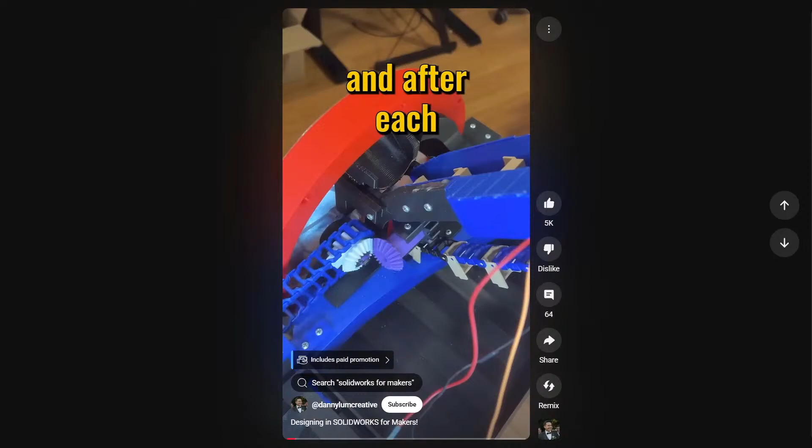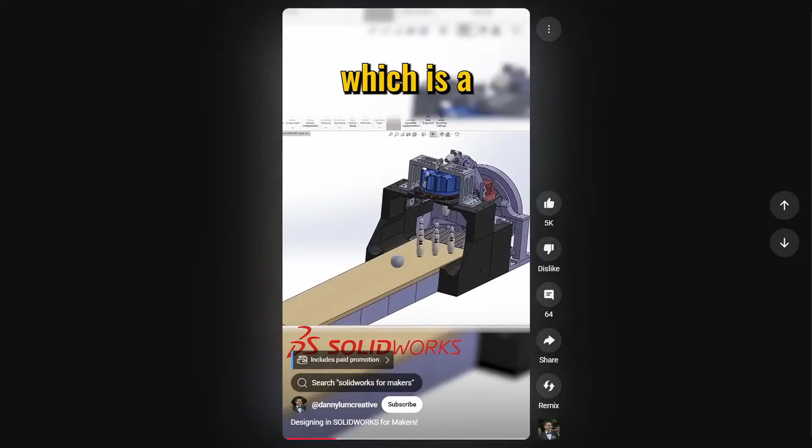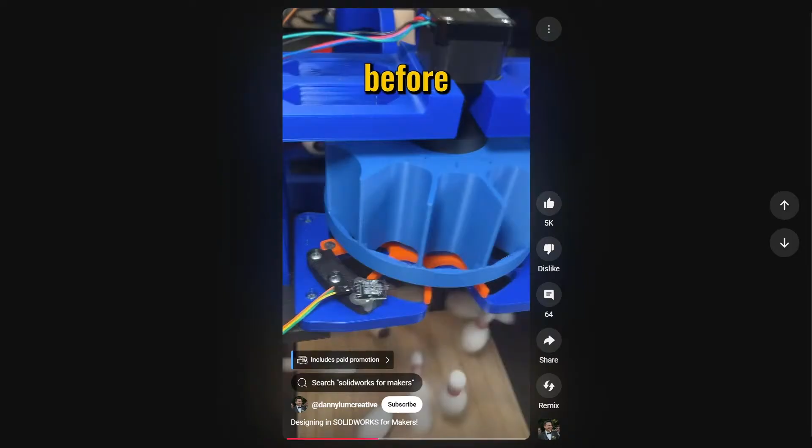And his name is Danny Lum. Danny is a SOLIDWORKS user. What you're seeing here is a project that he created. I'm not sure if you've seen this before, Jesse. I have not. So this is fully designed in SOLIDWORKS - I think every part except for the wires, every single part, gear, pin, everything was 3D printed and modeled in SOLIDWORKS.

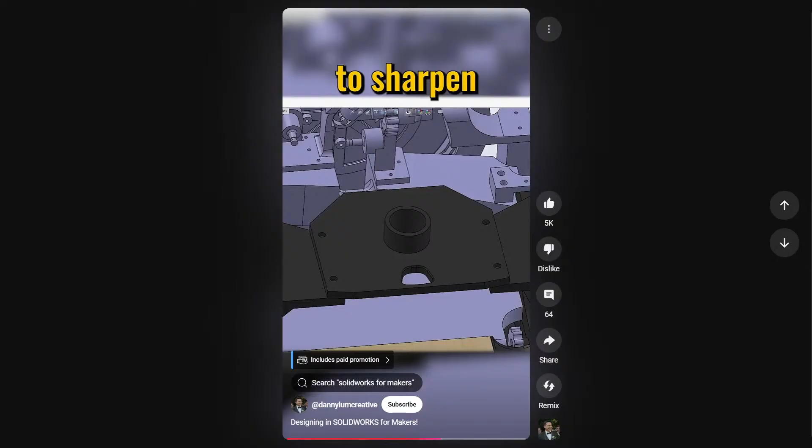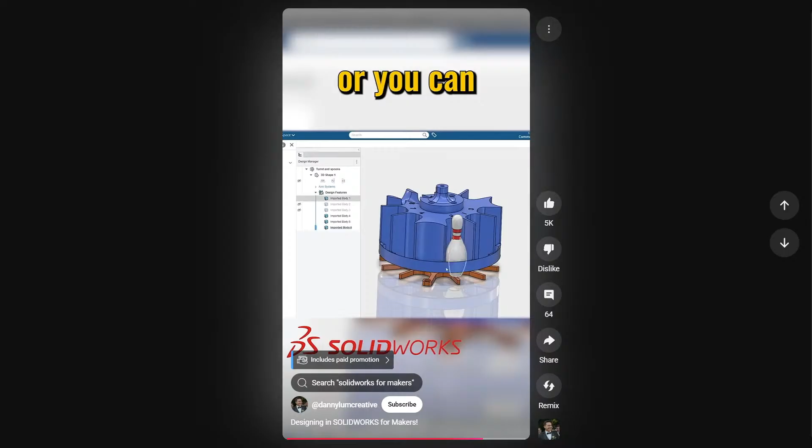He shows in the YouTube short, which is what I pulled this from, that he used a design library to pull in little gears and different components he's commonly using, and once again, 3D printing. Essentially what this assembly he's created would do is take in the pins and re-rack them - it collates all the pins, and then through a sort of conveyor system, it picks and places them back together. That's so cool.

It's very cool. I'm always impressed, if nothing else, by people who have the patience to print projects of this scale. I print something that's like a 15-hour print and I'm like, I don't have patience for this. Granted, I have a relatively old printer, so it's a little slow, but printing something of this scale, I can't even imagine having the patience for it. I want it done, and I want it done now. I'm impatient. Yeah, it's pretty intricate.

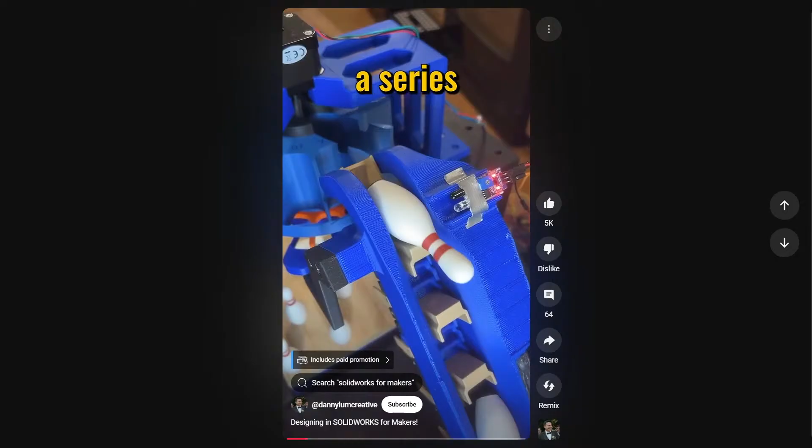So you guys see this as B-roll, but one of the reasons I selected this short, besides it having hundreds of thousands of views, is that it's pretty remarkable. That's how I became aware of it - I recently got the chance to talk to Danny, and you will too, next month on SOLIDWORKS Live Design, our other streaming series, as he'll be the featured presenter, going through different elements of mechanism design and assembly design in SOLIDWORKS. Very excited for that. Be sure to subscribe on our YouTube channel so you can stay tuned and get an alert when that episode is published and scheduled.

So very, very excited. Yeah, that's cool. I'm looking forward to that one.

Jesse, do you want to get into the enhancements? We are front loading a lot of these. I'd say we have my two personal favorites first. I agree, so let's get into it. We'll give the good stuff away first, but sure.

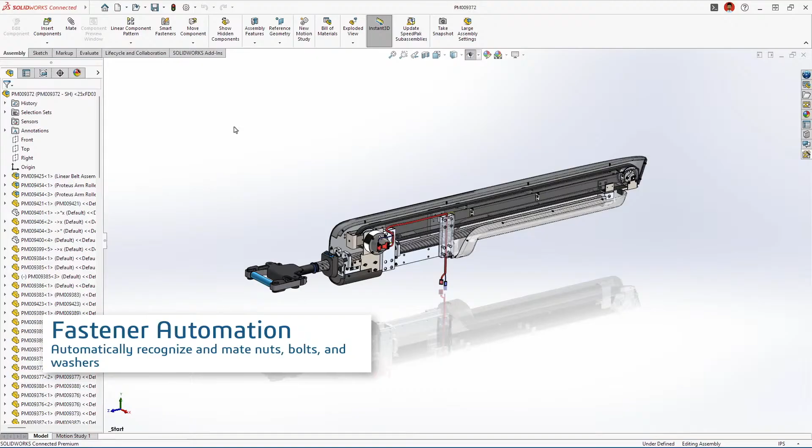SOLIDWORKS now automatically recognizes nuts, bolts, and washers based solely on their geometry. You can get a new cursor icon that confirms the fastener recognition, as well as automatic mating with a simple drag and drop. That sounds too good to be true. Boy, do I love automatic mating.

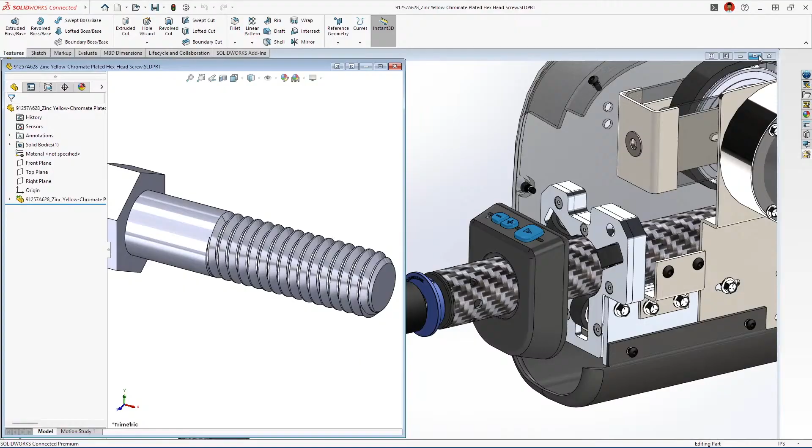So now we're not talking about toolbox. No, not necessarily. And this is an area where I said I'll shout these out - you really should watch these. This is an area where you'd see that in a demo, right? Yeah, because our colleague Mark actually shows he drags in a fastener that he's downloaded from the internet, and it's a step file. Very neat - that was one of the most impactful, and you can see he's dragging it right from Windows Explorer.

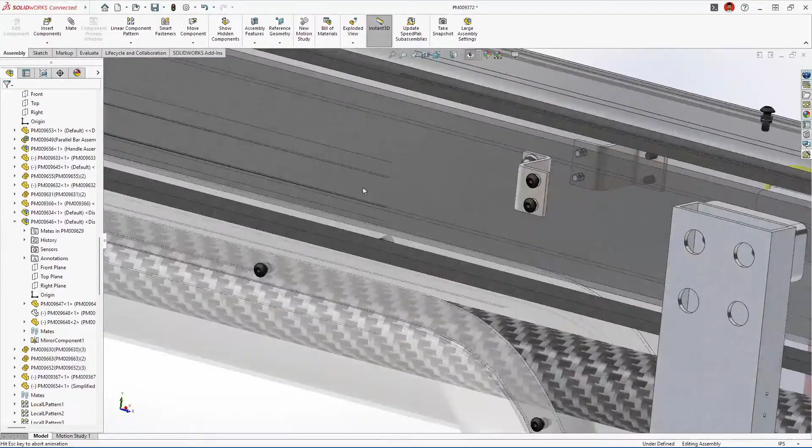I love those sorts of demos because you get tips within the tips. There's nothing special necessarily about these SOLIDWORKS files, and they aren't even necessarily SOLIDWORKS files that you're using - it could be imported files.

This is one that I would not believe if I hadn't seen and used it myself. Like, how would it? I still don't even know exactly how it does it. It's identifying that this looks like a fastener, and if it is a fastener, then I know what kind of mates to apply to it, and it will then do that for you automatically.

I find adding fasteners to be one of the most irritating parts of building an assembly, just because it's repetitive work - the same thing over and over again. Even when you're using quicker methods, like peg mates, drag and drops, control select, profile center mate, there are so many good ways to speed the process up, but it still takes forever because you've got so many of them to do. Even with the most efficient method possible, there are generally hundreds, potentially thousands of fasteners throughout an assembly depending on its size. So adding in all of those little bits is really time consuming, and anything like this where you can just drag and drop it regardless of what you're using is really cool.

You obviously work with companies online that are selling hardware, and you can usually download directly from those sites, pulling down the hardware you're using. Now, if you're using a combination of toolbox and purchased fasteners, that always gets complicated - you've got to mix and match. But it doesn't matter as much anymore because now you can make use of very quick methods of getting those in place regardless of what it is.

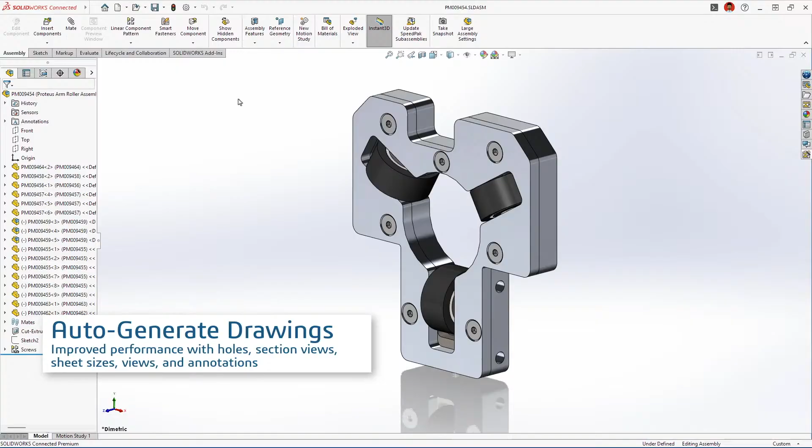So at the top here, in 2025 FD02, which came out about 7 or 8 weeks ago, we introduced automated drawing generation, and it was a great start - a great start to a mode that we have now enhanced with FD03. We've enhanced the capability with recognition of hole geometry, section views, better arrangement of views and annotations, and best fit sheet size, which is truly remarkable.

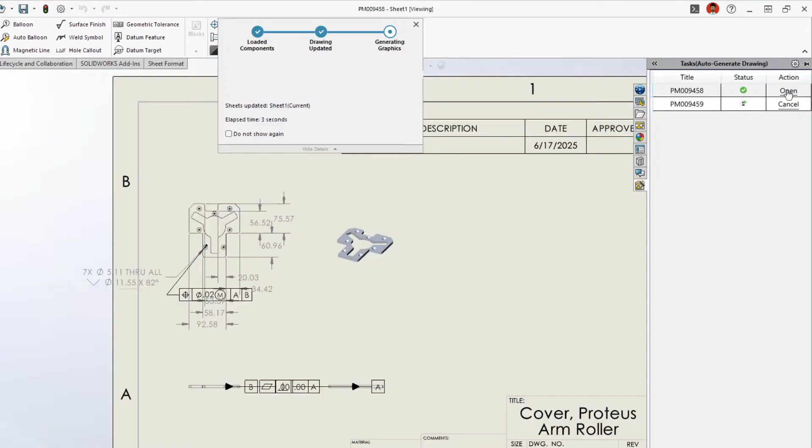I think if you look at the demo, you can see some really good examples. It gets you - and I love this - because it's a very riskless process. Click the button and it'll do something, and you might like it, you might not. Maybe it gets you 60 to 70% of the way there.

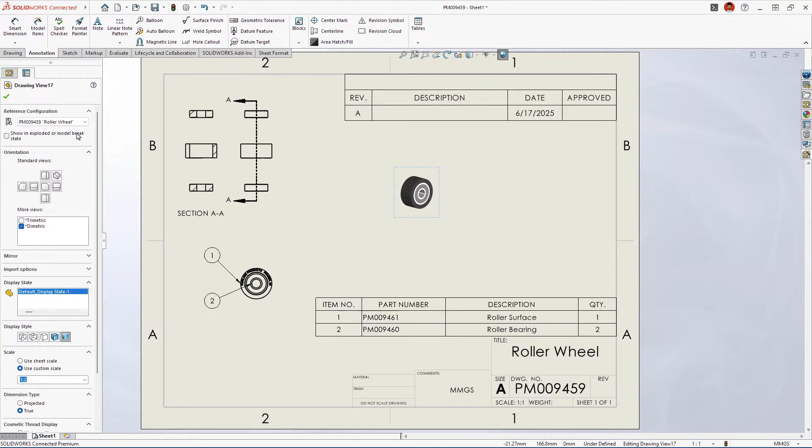And one thing I love - I think Mark made this demo as well. Mark Peterson, I think, makes a lot of great SOLIDWORKS demos just showing how it works. One thing he shows is that he does it as a batch process. He goes right into the assembly tree, selects multiple components, goes into the shortcut bar, selects auto-generate drawings, and it makes a task in the task pane whereby it's making individualized drawings for the selected components, which I think is awesome.

Yeah, that alone is cool. And then you consider, okay, once it's created those, he's going in and making adjustments as necessary. So maybe in a given view or set of views, he's changing the display state of the views. Maybe he's changing the configuration that's in use, or changing the view size. So this isn't a case where if it doesn't give you the perfect output per your preferences, you just have to scrap it and never use it again. You might have to make some edits.

I kind of almost think of it, Jesse, as having like a skilled intern or contractor who is just working for you in the background. And maybe you have to review their work, sure, and make changes and advise some things afterwards. But still, it's doing a lot of work for you, and it takes a minute. Yeah, that's a great way to put it.

I think we talked about this when the feature came out on the last show for FD02 too. But I like this - engineers, I think a lot of people take pride in their drawings, and rightly so, right? So I think sometimes people would maybe shy away from a feature like this. It's like, I like my drawings the way I like them, I like everything clean - it's the way that engineers communicate. So to take some control out of that, I could see having some resistance to it.

But in the last show, we talked about how it isn't really that. It's not going to make a finished drawing the way that you would make it or your company makes it, but it takes out all of those little repetitious steps at the beginning - just getting things on the sheet - where you're not adding any value as the engineer making that drawing. You're just picking and placing things. You take all of that out, then you can add value where you're adding value as the engineer making that drawing, to communicate the things that you want to communicate.

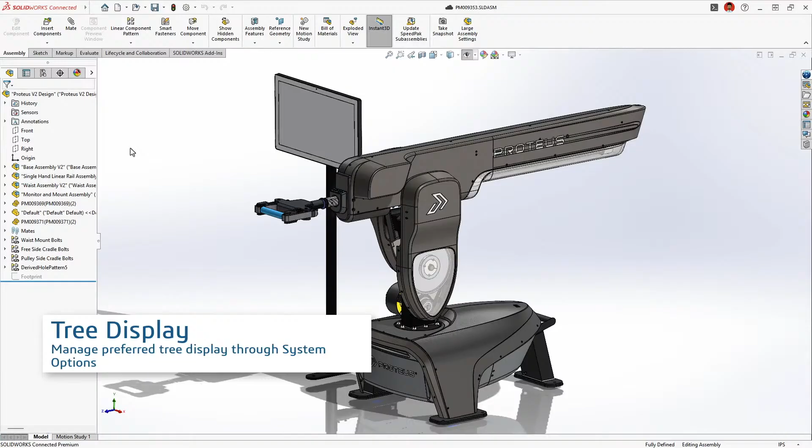Let's hear a recap of this one first, and we'll go into it. So, tree display options have been customizable for many years. However, these settings were saved into the assembly file itself. New for FD03, these options are now available as an override in system options. This puts you in control of how your trees are displayed, not at the mercy of what is saved into the file. I really like this one because I do tend to customize my tree view.

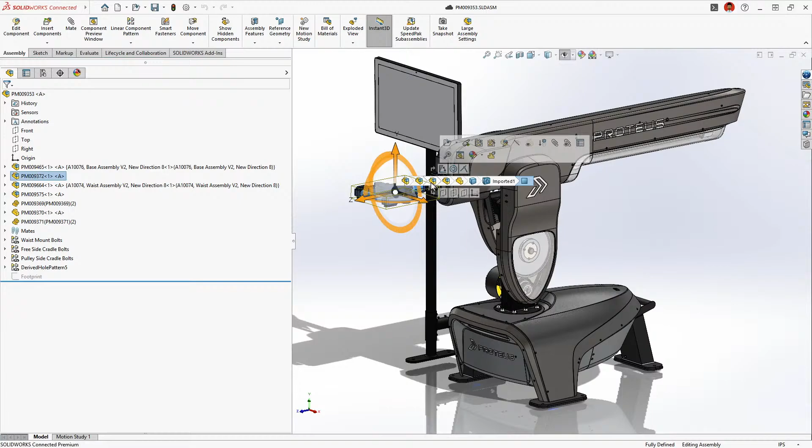Mike Sandy did this one and literally his SOLIDWORKS screen is customized to the nth degree. So Sean and I are chuckling if you're just listening along and not watching the demo. No detail spared in terms of characteristics of a component in the tree, like the description, the name. Mike, who did this demo, did a funny job of turning on everything you could turn on in the tree, just to show exaggerated how long and cluttered your tree could end up.

And that's not me. I actually go the other way. I turn off as much as I can turn off. I want it as clean as possible. And a lot of people don't realize that you can actually control that, right? You're not stuck with the defaults of what gets shown in your tree. For a very long time I didn't know that.

Yeah, and even if you're using just simple controls in the settings, like the one we added a long time ago to turn off names that are not customized or added, right? So if you can turn off names for the default, the common default you see in there, you've got default config, default display states, everything's default. That doesn't add any value, right? So there's a checkbox and you can turn those off. That's not part of these settings.

Sure, but just in terms of customizing your tree, even if you just do simple things like that, or turning on the comment indicator - we were talking about comments for a couple of our previous shows - just being able to tune that information to what it is you want to see is part of the benefit of being able to control that.

But it always got saved into the assembly. So whoever is saving the assembly, you're either fighting each other or dealing with whoever saved the file with that information or that view, essentially. Now you can set it as your system settings, so you can say, this is how I always like to see my tree - just override whatever was there with the information I want to see. And then you'll always get the view that you want.

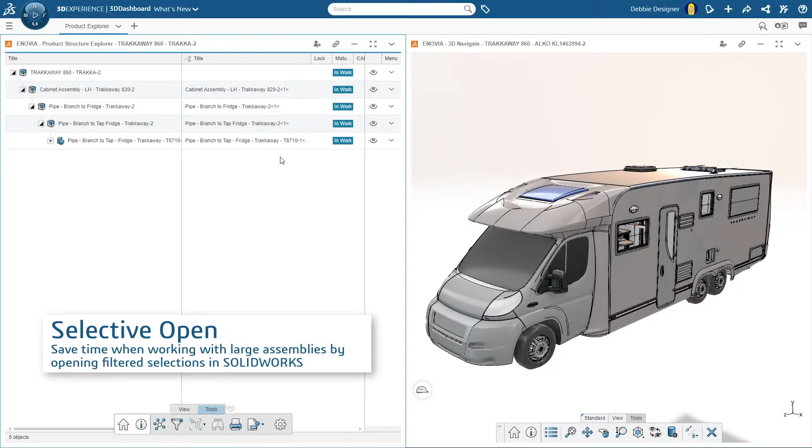This one that we're getting into now is called Selective Open. I feel like even the title, when we first started discussing this internally as it relates to SOLIDWORKS files, a lot of ears perked up. My ears perked up because we're all opening files, right? Especially larger files. This will no doubt be a game changer.

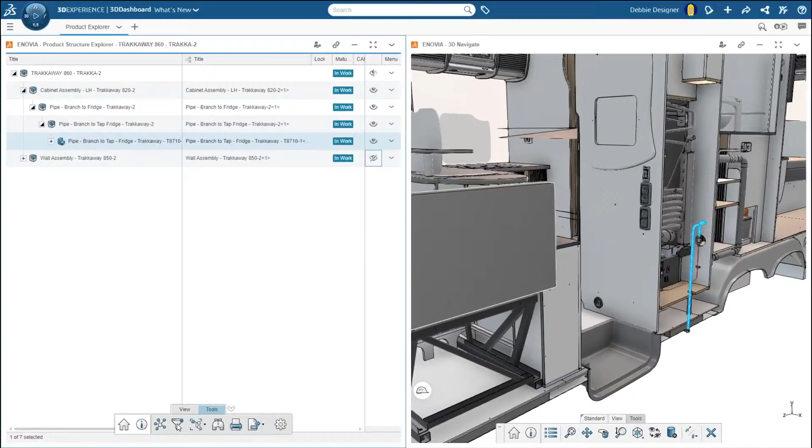Imagine, and a lot of us don't have to imagine, needing to tweak just one small portion of a massive assembly, but having to wait while SOLIDWORKS loads the entire thing, every bolt, every subassembly, every detail, just to get to it at all.

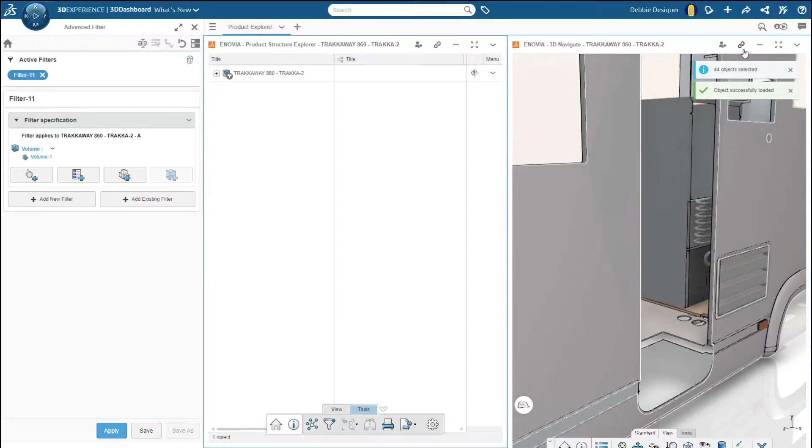Well, Selective Open solves that. It lets you open just the parts you care about based on filters like proximity and other metadata, so you can work faster and more efficiently.

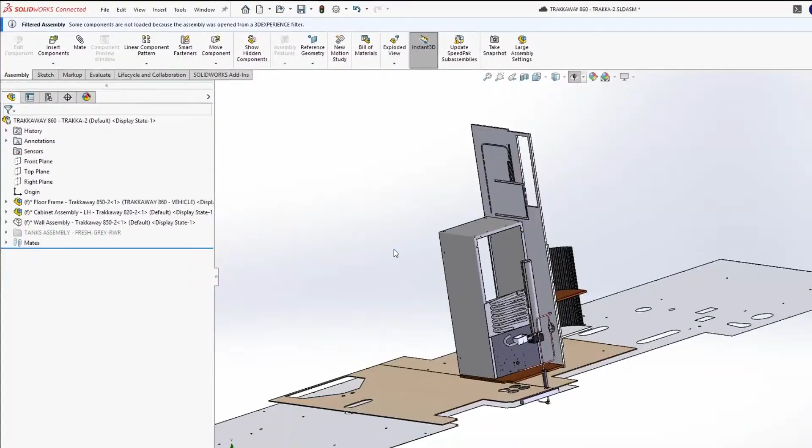I was going to say, you interrupted yourself there, but I was going to say, I don't have to imagine that. We've been doing that for the past 30 years, I guess. Yeah, a lot of you don't have to imagine that.

To speak overarchingly about the direction of the software, this is an area where even in some other enhancements we'll soon talk about, we're seeing loading cycles considered differently. What I mean is, for years with SOLIDWORKS, it was let's just load everything, and then once we've loaded everything, regardless of when you may need to access it, then you can start zooming in and out and rotating. You're literally not doing anything other than just waiting for it to load.

We've been using this term lately in some areas, and I think it's more of a generalized software term: lazy loading, wherein you're loading just the data that is needed for a given task or application upfront, and then loading more data as needed.

So Selective Open, as you'd see in the demo if you watch this on YouTube, is effectively making a sort of component set from an assembly. You can do this with any assembly, but particularly with large assemblies, as we see with the camper here, it's a bit more impactful.

What we're seeing in the demo here is we have a set of piping, and based on the offset proximity from the piping, we are grabbing other components that may be surrounding it. Think about different applications within assembly editing and structure, right? A lot of times, naturally, when you have a component, the neighboring components are the ones you're going to add mates to or measure distances to and from.

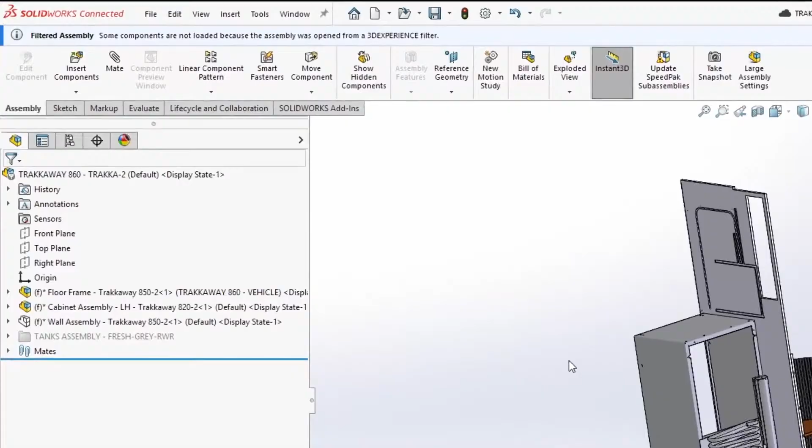We should say, within the vignette, within the demo, you see this. When you open up the filtered view of the assembly in SOLIDWORKS, you're given a ribbon at the top of your command manager area, where all your buttons are, and it says you have loaded the assembly in a filtered assembly state. So there is that sort of identifier. Now there are a lot of buttons and menus, so you might lose track of that—that's one downside—but it does at least tell you you're in a filtered assembly state.

I think it's important to talk about what a filtered assembly is and isn't. This isn't a replacement for assembly configurations, for example. Right, and it's not a replacement for display states either. Like if you're making a drawing of an assembly, you can recall display states to show in views, which are lighter weight modes compared to a configuration with things suppressed and unsuppressed and mates loaded or not loaded. Same with configurations—the assembly in different movement states, etc.

So that's a good point—you could probably now use each of those options in a more targeted way. I agree, because a lot of times people would use those, maybe not the way they were intended, just to try to mimic some of this functionality. But now you don't have to do that—you can use this as your day-to-day opening methodology, and use your configurations and display states for their intended purpose.

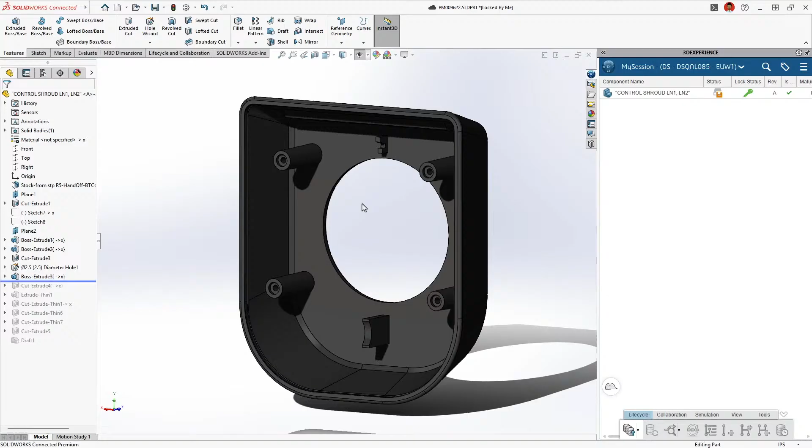As we talked about 7 or 8 weeks ago during the previous Delivery Day episode, which I believe is called Workflow Wonders, you can still check it out on YouTube and Spotify, we've now been designing more experiences for those unplanned occasions, so unplanned offline mode. That was really the first of several steps to make that experience much better for you in those cases.

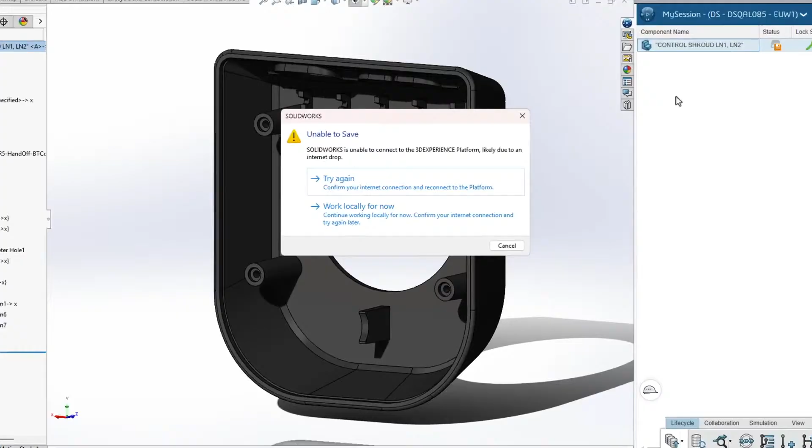In that instance, we were talking about and showing cases where you would launch SolidWorks and it was not able to retrieve a license because you were offline in some capacity, or communication couldn't happen between your host, your PC, and the license server within 3D Experience.

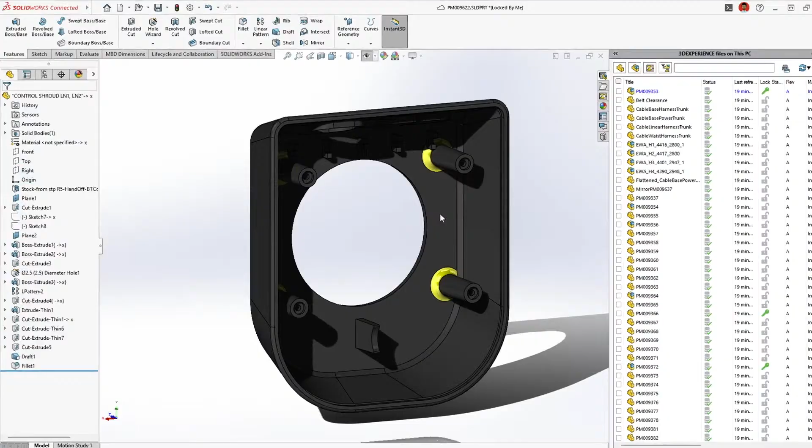We've now expanded that for mid-session applications, which is what we're talking about with FD03 here in July, wherein if you're working on a project, on some files, and all of a sudden the Wi-Fi goes out, or you can't connect to 3D Experience for whatever reason, you're now covered in those situations where your files are the files you already have local. You can continue working on them until you're able to regain that connection.

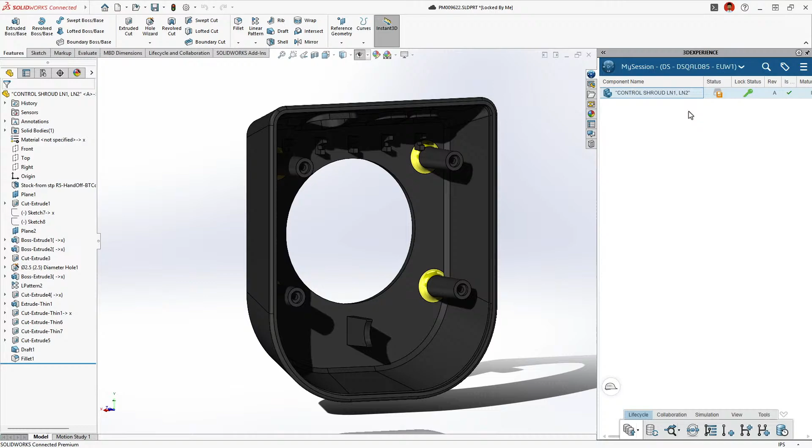I think this is great. It gives you that sort of assurance that you expect from desktop, and now it's able to extend itself to your cloud connected workflows as well.

If you had just a quick blip or something, it's not going to keep switching you into offline mode. It will try, I think, 5 times or so to reconnect to the server. If it can't on the final attempt, it says okay, something has gone wrong here, and then you can switch into offline mode. So you won't get constantly triggered by every little blip of your internet. There's a wait period where it tries to figure out what's going on, and then it says something has gone wrong with your connection, and you can go offline.

Awesome. So we just went through 5 of 15 enhancements. I loved this slate of 5. We have some really exciting ones, more on a collaborative end, coming up in just a moment here.

But Jesse, let's go to a commercial break that features its own enhancement.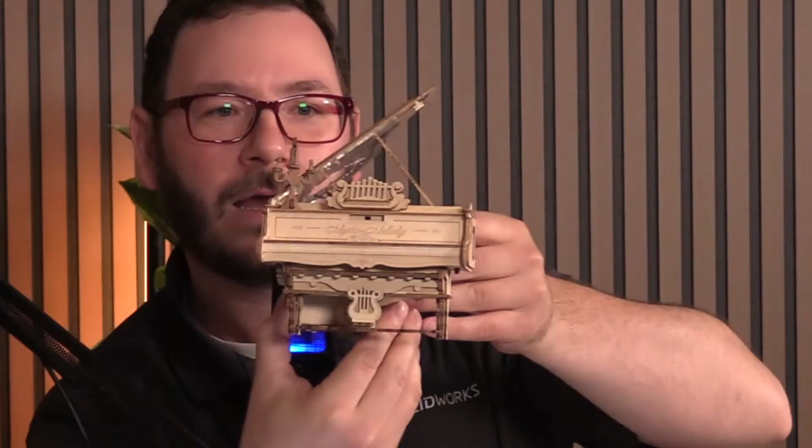This looks like - I was just talking about printing taking too long - this looks like it would take quite a while to put together. I wonder how people put these together. So it's laser cut, right? Yeah, I think it comes laser cut. It reminds me of those ships people build in bottles.

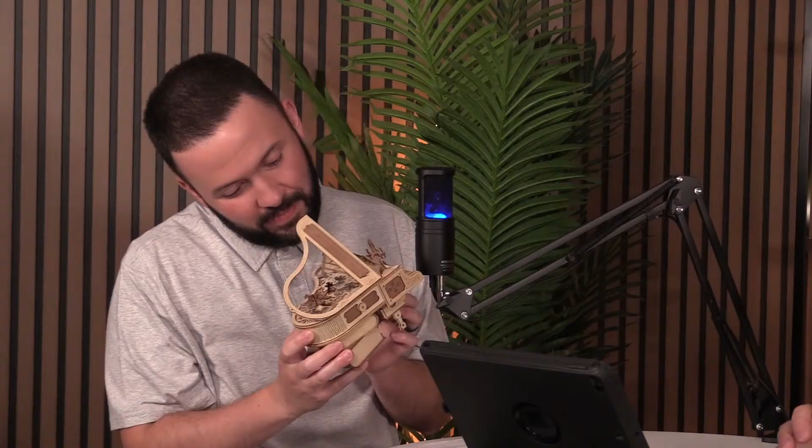Our coworker Z, who works upstairs - Sarah Zuckerman, some of you have heard but probably not seen on camera because she has an aversion to being on camera, lovely person - I think she builds these. I've seen these on her desk, so this probably came off her desk upstairs. I think she's got like a bunch of them. Let us know in the chat if you're into building.

Oh, I missed that. Play some music. Let me wind it up a little bit more. Don't wind it too much. It'll be going in the background for the rest of the episode. That's really cool, I like that.

Okay, we are back with some new features here in 2025 FD03.

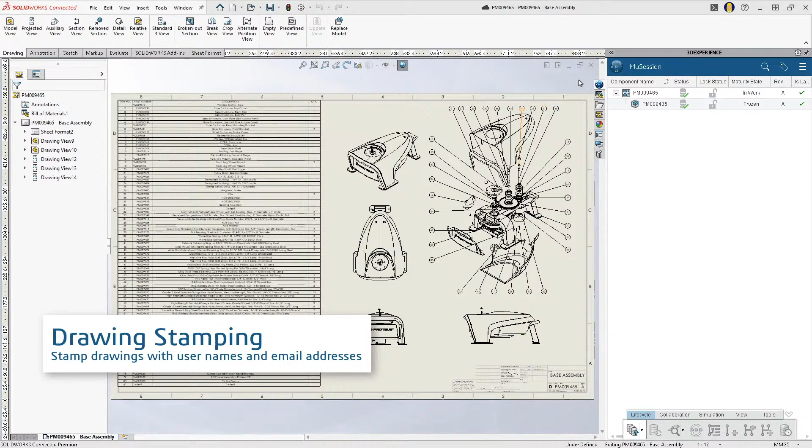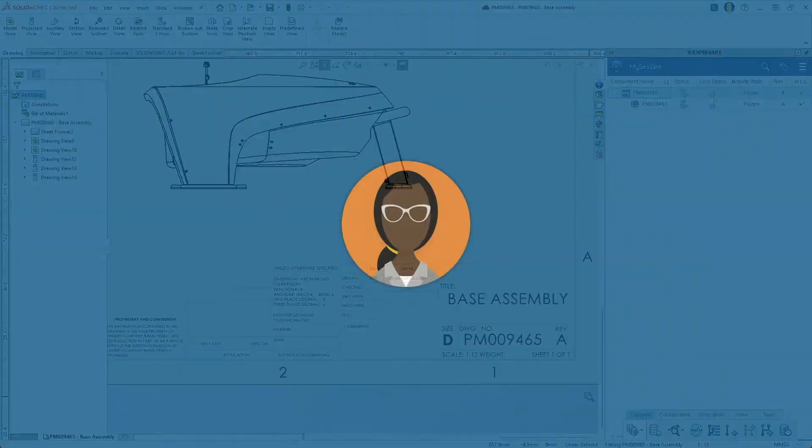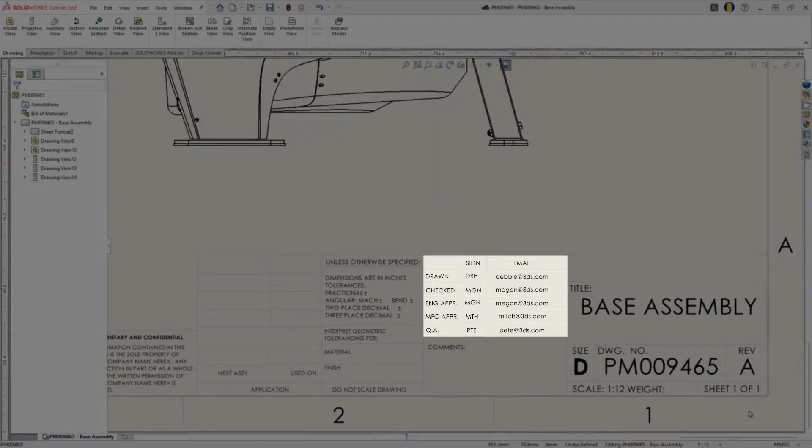So this one is drawing stamping, doing a lot with drawing stamping. You can automatically stamp your SolidWorks drawings with extended attributes indicating approvals, such as associated usernames and email addresses. This helps ensure stakeholders involved in the release process can be easily identified and, if needed, contacted. This probably looks very familiar to an enhancement we showed whereby via a change in the maturity of the document, in this case drawings, we're getting stamping onto the SolidWorks drawing. In the previous FD, we showed a name getting stamped, and now we're able to stamp usernames as well as email addresses onto the drawing. Drawing stamping, to be clear, is something that, ever since I first saw a title block on a drawing, there have been spots for - maybe we don't call it stamping necessarily, but just to indicate approvals and dates of approvals of a given manufacturing drawing. We're just basically adding more properties, more metadata that corresponds to the approvals to be stamped now onto the drawing if you choose to.

The email address thing is interesting because it just makes it a little bit easier to contact someone in case you had a question or need to know who did the approval and when. And I've said this before in previous FDs where we showed drawing stamping, but tying it directly to the process just makes me happy as someone who likes process management. It's really interesting because it isn't always the case that the person doing the approving has a seat of SOLIDWORKS, and they don't even necessarily have to have one now.

So you would see in the vignette that we have a web viewer called 3D Play. If you have cloud services, if you manage or share your designs on 3D Experience, 3D Play is just like a viewer web app. You don't have to install anything, it's just there. You can use it on your iPad or your PC, using Google Chrome or any other browser. And so it just stamps it to where if you open it in SOLIDWORKS, the stamping is there. It's obvious that it's tied to the approval - it stamps the appropriate name there or email address. And it just makes it much closer tied to the process, which I like.

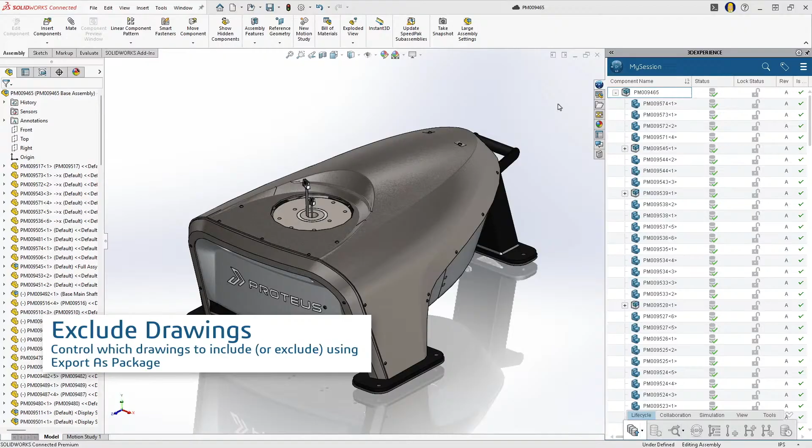All right, so we're gonna stay on drawings. Now we have the option to exclude drawings, now that we've got them all set up, get rid of them. So in the Export As Package tool, we now allow you to choose drawings to include or exclude. This helps reduce the package size by skipping unnecessary files, letting you share only relevant information. So this is for export package.

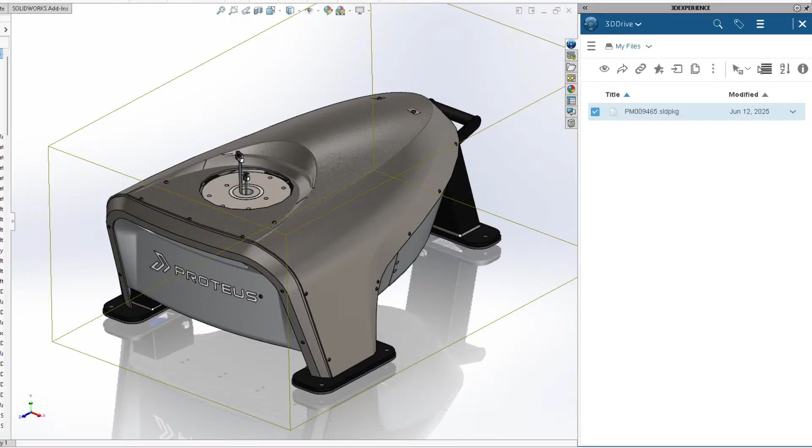So maybe just to back up a step - what is export package? Some of you may or may not be familiar with that. Export package is like a pack and go, in the sense that you're bundling up a bunch of files. The way I like to think about it is a pack and go just for your platform stuff. If you're storing your data - if you have cloud services or if you're using 3D Experience SOLIDWORKS - all of that data is linked to the platform, that's how you're keeping track of everything. A pack and go will just make a separate zip file that goes off into the ether, and you can then manually try to deal with that after the fact. Export package is a way that you can manage that information and keep it in sync with the platform, so you can send out a package, bring it back, and it will have information.

This is what's changed - do you want to bring it back into the platform? So if you're using the platform to store or manage your data, this is a great way to send stuff to somebody. If they make any changes or whatever, you can send it back.

Now we're allowing you to choose whether you want to include or exclude certain information, in this case drawings. Sometimes you've got a bunch of drawings that go with something that the person you're sending it to just doesn't need. There's no reason to send them, and furthermore, you might not want them to even have access to them for certain reasons anyway. So at this point, you can say, nope, don't need these, don't need to add to the file size, or they don't need to have access to them. We can exclude them from the process, but still use the packaging system to send it and receive it. So a nice little update there that you can choose with more granularity what it is you want to send somebody if you're storing your data on the platform.

I think another thing to mention here is the workflow in the demo, particularly towards the end, where you see someone in this example case taking that package that's been exported by someone who's probably managing revisions and actually working with a team inside of SOLIDWORKS connected to 3D Experience to manage all that for them. And then you see someone who's importing the package, and they're importing it to a storage drive, basically a cloud storage drive. So they don't necessarily have to be mapped to your cloud, your company's space. They can work on it and then repackage it, send it back.

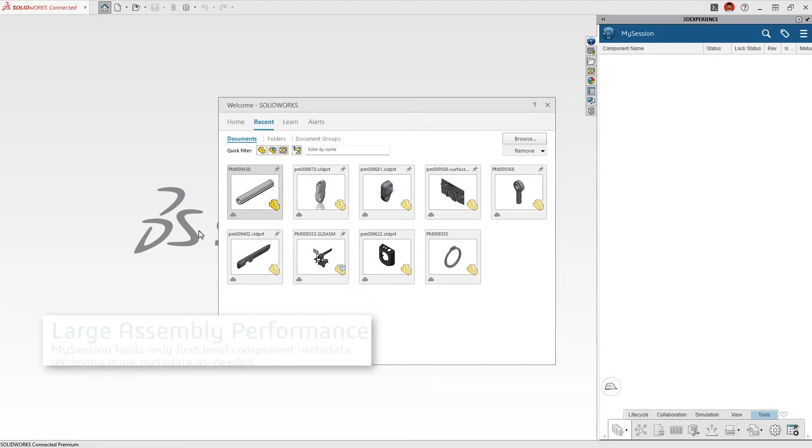We talked about large assemblies earlier in the episode with Selective Open, but now we're talking about raw performance in session, particularly targeted towards large assemblies. This enhancement to the SOLIDWORKS connector, the add-in that shows up for 3D Experience inside SOLIDWORKS, gives users more control over how much collaborative metadata, like if the file has an owner or who it's locked by, loads right away within that task pane area. By default, everything used to load all at once, even though it wasn't necessary on demand for the vast majority of projects.

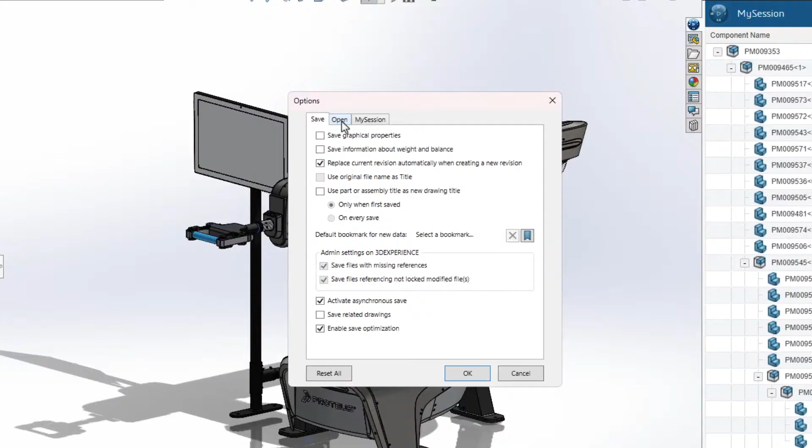If you're watching the vignette, the default behavior still today is that it expands everything. Picture an assembly tree at the top level with 8 sub-assemblies, maybe a couple parts at the top level. All of the sub-assembly components would also have their metadata, such as is this component locked, which revision is it, what's the maturity state, who is it locked by. You don't necessarily need to be seeing all that or refreshing it or have the server constantly checking on that. So now you can switch an option, as we show in the vignette, so those items are collapsed and not shown or readily loaded in by default all the time.

This gets back to what we were talking about earlier with lazy loading, right? Where a lot of times when you have a top level assembly, especially with larger assemblies, this becomes more of a concern or a topic of interest. You don't necessarily need all that sub-component level stuff, like your sub-assemblies and their parts, to be loaded in.

This is somewhat reminiscent of a generalized assembly modeling enhancement we displayed, I think it was last FD02, where you're now able to disable auto resolve of components when you expand the tree. Yep, took the words right out of my mouth. Yeah, I was just going to say that. So can you talk more about that one?

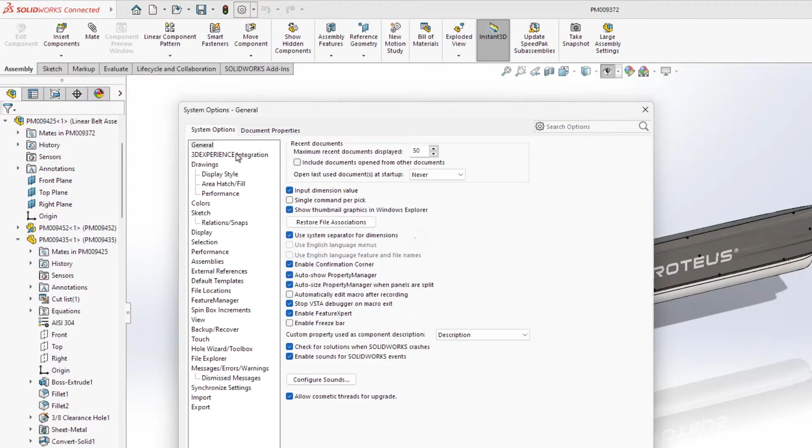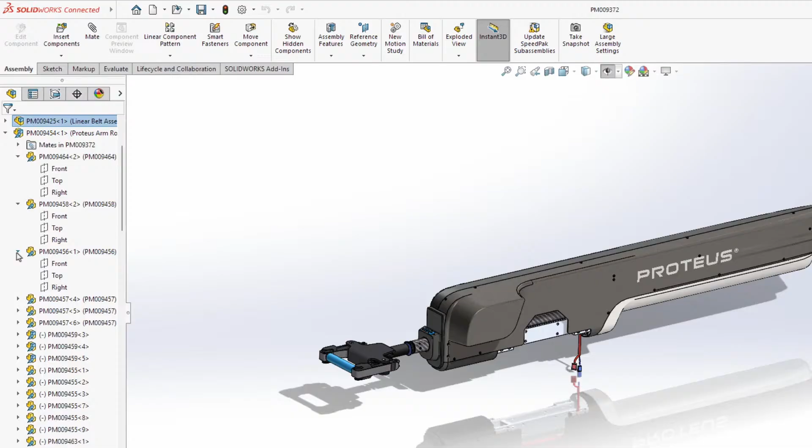I guess it's more similar to having the functionality turned on, the auto resolve. So if you open an assembly in lightweight mode, that does exactly what we're talking about. This is the equivalent of lightweight mode, but just for metadata. Lightweight mode will not load everything in every part in your entire assembly. It's like the next step up from large design review mode, giving you more than that, but still not fully resolved.

That's a nice benefit if you have auto resolve turned on, because as you go digging through the tree, it starts loading everything underneath. It's basically selective, as you choose, I need information on this, then it will load. It takes whatever's in the top level, loads that, and as you investigate the tree, it starts loading the information in the parts. This does exactly the same thing, at least to my understanding, but just in the MySession pane with metadata. Same technique, basically, from what I can tell.

Essentially, I think the big takeaway is with larger data sets, SOLIDWORKS is utilizing in several arenas more of a lazy loading methodology, which I think more so matches how we tend to work with those sorts of file sets.

And obviously this is geared towards large assemblies too, right? So if you've got a ton of data, that's when it's going to take the longest to load. But in those cases, probably the majority of the data you're not using, right? You're not accessing until you need to. So it just makes sense to only load it when you need to go look at it, because most of the stuff in there you're not using right at that point in time.

Yep, 100%. Speaking of files, what about deleting files? Yeah, we can delete files. So let me read the blurb here: previously, you could only delete document objects from collaborative spaces, but now the delete command is always available, letting you remove any object type. You'll get confirmation prompts, and messages will guide you based on your permissions and the object's maturity state.

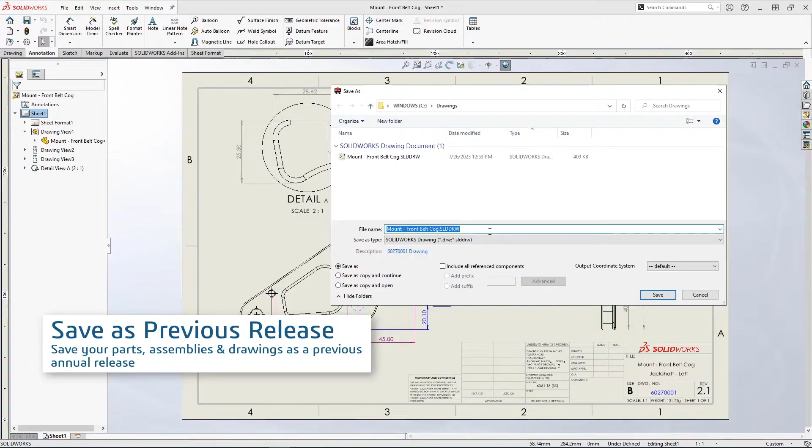Save as previous release, which feels like a really old enhancement. But Jesse, do you know when we introduced this? It's been 2 years. Which major release are you saying? I'll say 22. No, we're just releasing new stuff all the time now, so it feels really old. It was 2024. 24? Really? I believe so, yeah, 2024. We are in a weird time warp. Now because we get 5 releases a year, I could be off. I'm 95% sure it was 2024. I was going to say 23, but it could be. I guess 2 years back from now, we're just about into the 26th release, so I was right. Again, weird time warp, it could be.

Let's see, what was the 24 release? We had Bowhead that year. Bowhead Corporation, adaptive off-road bicycles, check them out. Yeah, I think that does sound right, the more you say it. I have the craziest libraries on my computer. If you're a SOLIDWORKS nerd, you'd love my libraries of different clips. That's exactly how it is, like 'let me go to my 2024 treasure trove with Bowhead.'

I think a lot of people still don't know about this. I still give user group presentations where I'm explaining what this is and that it's available, and people are like, wait, what? Can you do parts, assemblies? Yeah. What about drawings? And you can. You can.

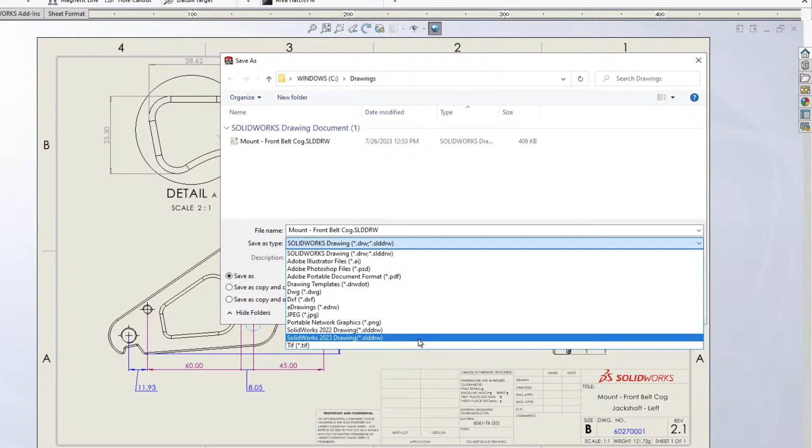There are reasons why you might want to do this. You can still open a drawing even if you don't have all of its reference components. So let's say you're using 2024 as your primary SOLIDWORKS version, but you save it out as a 2022 file. Others can still open it and view the drawing, though they won't have access to the components and everything. They can still measure edges in the drawing and annotate as well. So there are a lot of reasons you would do that.

You do have the include all reference components checkbox whenever you do Save As. But with Pack and Go, it's practically inherent, right? That's a great point to add to this one. It goes 2 major releases back, and it is a Save As - basically you're saving a new copy of the file or files when you do it. It's been around for a while.

If you don't watch stuff like this, it's so easy to miss - and this is why I recommend sharing this episode with your colleagues or on your social networks. Because if you're not watching stuff like this, you'd have to go to Save As, see it, and forget about it.

I almost forgot about it the other day when I went to need it. I was like, oh, hold on, I can just Pack and Go this backwards - that's what this is for. Yep, exactly. So yeah, that is our feature flashback of the day. That's a good one. That was a great enhancement, and it remains a great enhancement.

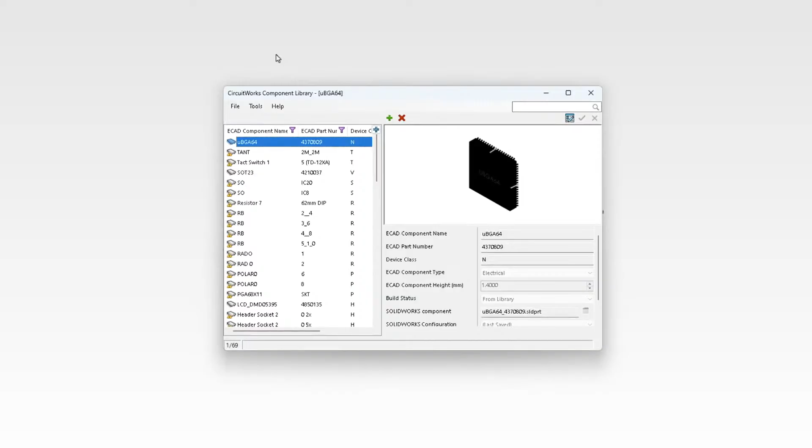All right, so let's get back into some really new stuff here as of July 2025 with the FD03 release of SOLIDWORKS 2025. What we're seeing here is an enhancement to CircuitWorks Libraries. This was brand new as of 2025 - CircuitWorks, the add-in, became available to all SOLIDWORKS users on subscription. Essentially what CircuitWorks does is take in PCB data, typically 2D data, and map that to 3D component sets that are then imported directionally into SOLIDWORKS CAD, so you can have a full-on PCB representation within SOLIDWORKS.

So look out for that in your add-ins pane - Tools, Add-ins, it might be there. Check it out, there's a lot of help documentation and other resources online if you're interested. The enhancement here: you can now keep your CircuitWorks libraries up to date by syncing component data between SOLIDWORKS and 3D Experience SOLIDWORKS seats or licenses. This ensures a single source of truth so your entire team stays aligned with the latest library updates. The libraries are basically component libraries, and you can do this by a button click.

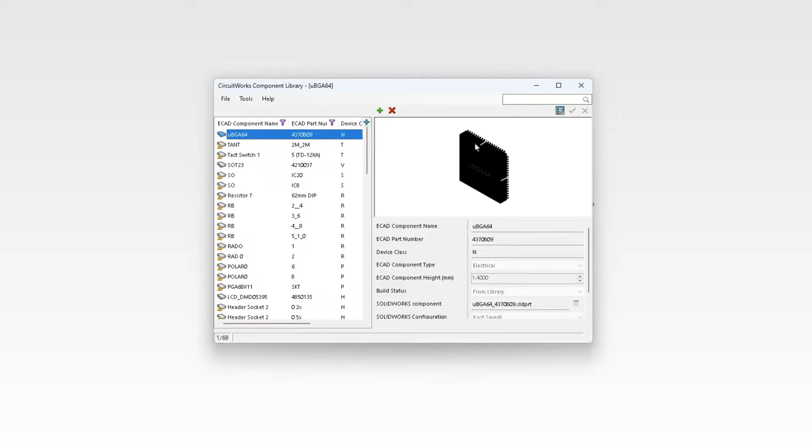Picture elements of a PCB - you have pin connectors, different pads, a lot of different types of components. You can see a PCB representation here on the screen if you're watching. Essentially, this is just making sure that all the component data, inclusive of its properties and the types of component data accessible, is mutually accessible in the same form between all the different types of users you might have. Some of you might be using SOLIDWORKS with cloud services, others might be using 3D Experience SOLIDWORKS, which these days ensures you'll readily have access to this because SOLIDWORKS is trying to auto-update for you.

In terms of relevancy here, a lot more of us have cloud services, 3D Experience SOLIDWORKS is more commonly purchased than ever, and we all, if we're on subscription, have CircuitWorks these days, which is a huge change. So this is a very relevant enhancement now.

That's cool. It occurs to me that this is probably also a nice use case for Selective Open, making enclosures and things like that - actually getting the physical parts in, and then you're looking at all the surrounding parts to make the enclosures for that. That's kind of a nice way to do it. You're actually getting physical geometry here if you're using CircuitWorks.

Yeah, that's kind of the nice aspect. Combine those two features together, and that's a nice way to work. I love looking at PCBs. Yeah, they're so neat. It's smoke and mirrors to me. I don't understand them, I wish I could design them, but I have zero knowledge. You have to pick. We can all relate to this. You kind of have to pick in terms of what you specialize in and what you pay attention to. But in a different life, I would love to do that. Same, it looks really cool.

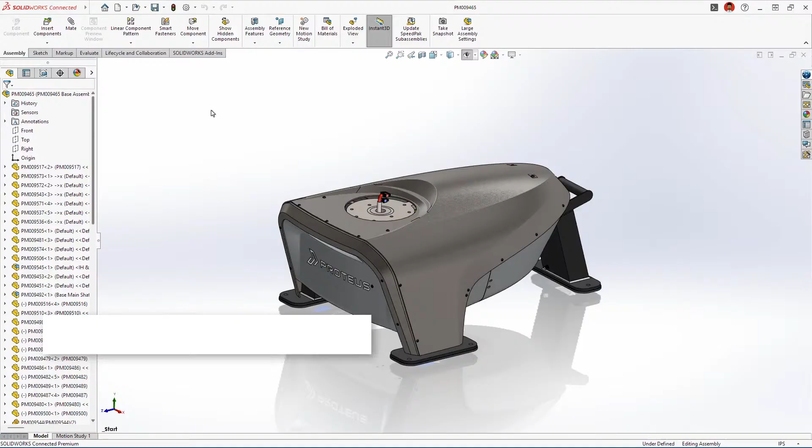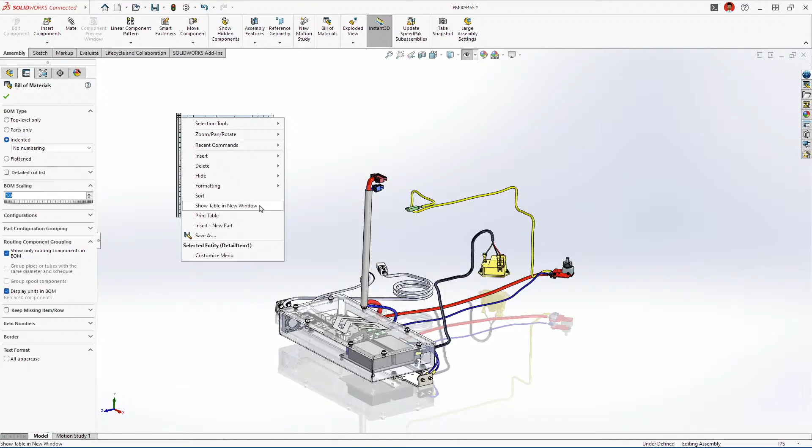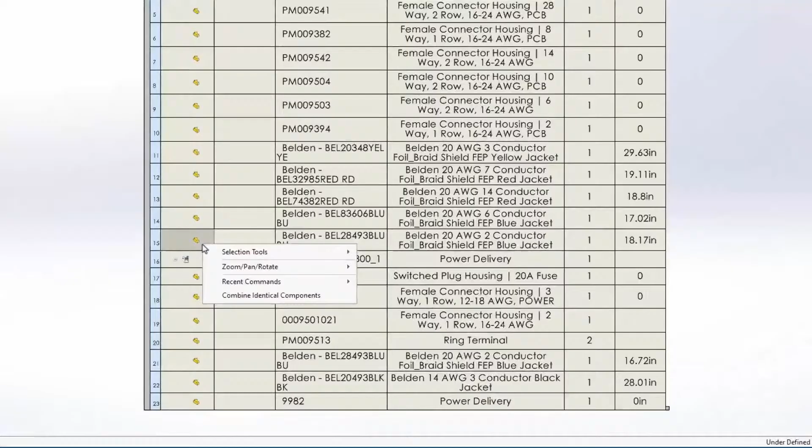Let's move on to a related arena with cable lengths. There's a change now, and we'll talk about the different packages that feature this in a moment, but you can very easily make wiring and cabling in SOLIDWORKS using SOLIDWORKS routing. The change here is in terms of how cable length and wire length is calculated and the options therein. You can now report the total routed cable or wire length of wires or cables in your bill of materials tables, even if these wires are used in separate subassemblies. This works in parts-only and flattened BOMs, as well as indented BOMs via the right mouse menu, combine identical components. So it's not that you couldn't get wire length before, it's just that you have greater flexibility in terms of how it's represented in BOMs of any type.

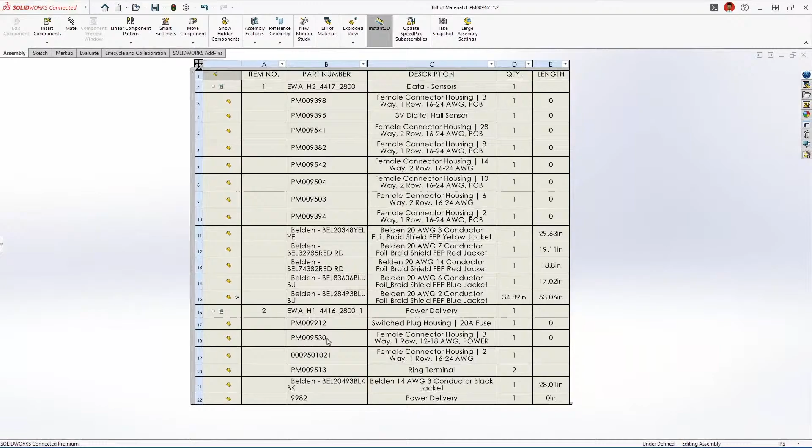So before, let's say you had a wire or a cable of a given type, it would show as two separate line items in a bill of materials tree, like we're highlighting here. Now, within bill of materials and assembly structures, you can have multiple subassemblies, and those subassemblies can have the same wire or cable type. Those would then show as basically the same identical wire or cable, but just of different lengths. Now you have an option through that right mouse button menu, combine identical components in the BOM, to essentially combine those even across subassemblies if they're the same wire or cable type. That's really nice, kind of squash them into one, so now the combined quantity is taken into account, as well as the length of that cable or wire.

So I would imagine, and again this is not my wheelhouse, but I would imagine the process before was to export this and then manually combine things to figure out how much wire you needed to order, where now you can just do it in one shot.

Yeah, you'd have to pull something there, that's just unnatural. Yeah, or you could hide, just do something weird like hide one of the rows and start doing some weird stuff. Yeah, and then you're breaking all your links and stuff. It's like if you start making SolidWorks, the more parametric linkages you're taking away from SolidWorks, you're just not using it the way it's supposed to be used. And maybe you had to do that because we didn't give you the option. That's kind of our fault in a way. Not anymore, not anymore, as of this July with FD03. So yeah, that's a huge one if you're working with wires or cables.

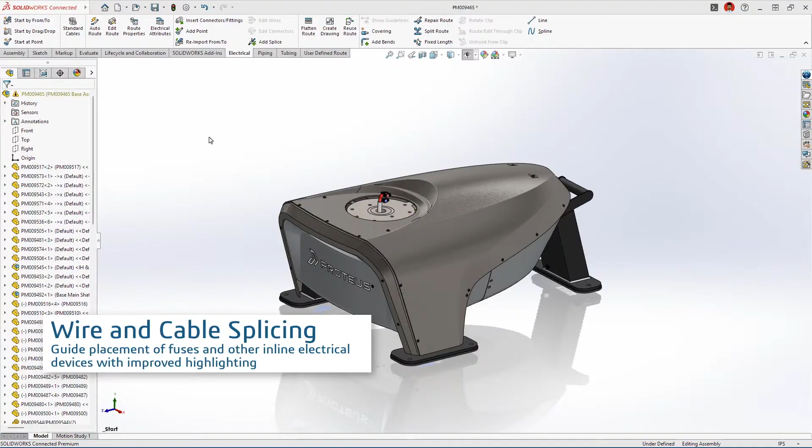All right, so we got another one on the wires and cables front. Yeah, we do. Speaking of clarity when it comes to wiring, we have some more visual clarity as well. In complex routes, it may be difficult to visualize the effects of a splice on a component. Now SolidWorks highlights the affected connectors and wires to make it easier for designers to make the correct selection.

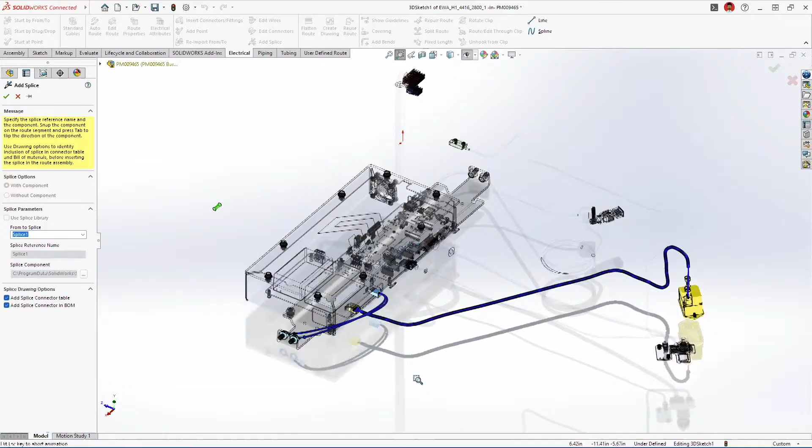So wiring is all just a rat's nest as far as I'm concerned. Every time I look at a wiring loom, I'm like, I don't know where any of this goes. And you kind of had the same problem before in SolidWorks too. Now, granted, you can spin the thing around infinitely in SolidWorks, so you have an advantage over real life in that you can zoom in and out and spin around. But it is still kind of hard to see what goes to what. And in this case, when you're adding in splices, making sure you're splicing the right wire would obviously be very important.

We now have some extra visual clarity there in that it highlights the whole run that you're actually splicing, so you can make sure that you're getting the right one rather than potentially misclicking and then figuring out you got the wrong one when you go to look around and realize you've got to go back and try to fix that. So make sure you get it right the first time, and that makes a whole lot of sense to me.

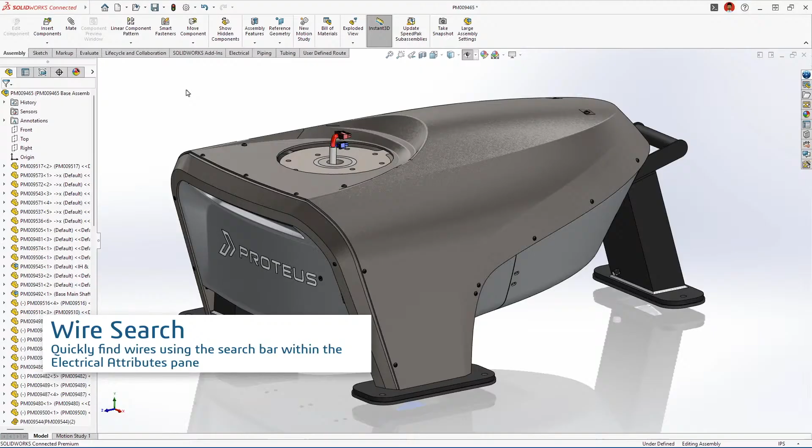All right, so we also have an enhancement when it comes to wires in terms of searching attributes of wires. So what do I mean by that? Well, previously, the electrical attributes property manager on the left-hand side, whenever you look at a given route's properties, such as its color, the cable diameter, whatever it is, we have a property manager that gives you the ability to look at all that. But key here with wires is we didn't have a search function inside of it. So if you had, basically you'd have to manually browse to find specific wires, which could take a long time given large projects. But with embedded search, it's now much easier.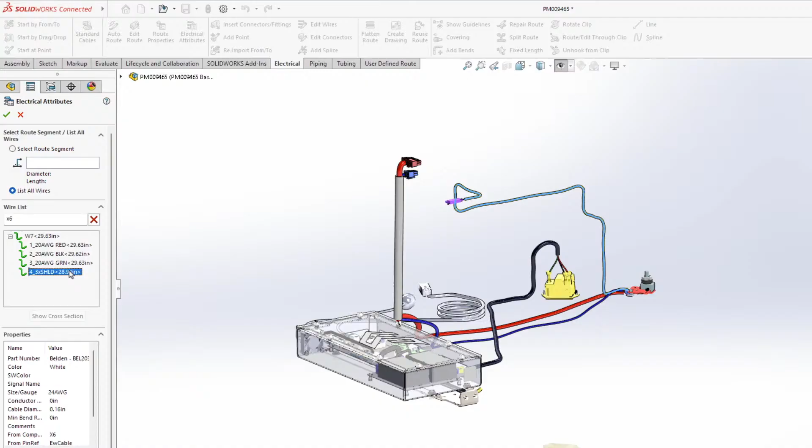So I should mention as well, we kind of shortcutted it a little bit in the solid spot, but the electrical attributes area isn't necessarily new, but what is new is that on the command manager it now has a button. So you can select that, and then as you can see here, if you're watching the vignette on YouTube, you can filter not only by the general name or type of the wire, but also through its several properties or attributes. So here we're giving a very basic example of just searching based on color, but color is important, right? Obviously, that's a very sort of high-level designation of a given wire or cable.

Yep. You can also search based on other characteristics as well. So we're just making it easier, overall user experience, user friendliness. And once again, if you have a project potentially like the one for 2026, the What's New 2026 dataset, the customer, I'm sure they might be very happy about that. But enough about that, we can only tease it. We can't tell you who the feature customer is just yet. We'll do that soon.

But yeah, Jesse, that's that. Yeah, that's the whole show. 15. Did we do 15? I wasn't counting. Yeah, we did 15. Don't count. Yeah, don't fact check me on that, but I believe it was exactly 15.

So in closing, though, once again, this is one way to take in the new enhancements, of course. But where else can we go to get information about SOLIDWORKS enhancements?

Yeah, well, obviously we have the website. We're always releasing video. Our team makes demo videos for all of these, which you've seen if you're watching this show with us. But we also have solidworks.com/delivery that you can go to. That has kind of a rolling update, essentially, of what's going on with those FDs. So that's my favorite place, actually, to go check on stuff. I think FD03 is up there already, I think. So basically, as they go, you can just go to that one site. It's easy to remember because you're all fans of Delivery Day. So solidworks.com/delivery, and then you can kind of get a quick recap, basically, of each enhancement at the FD level as you're going. So great place. That's where I like to go to keep tabs on things that have already gone live.